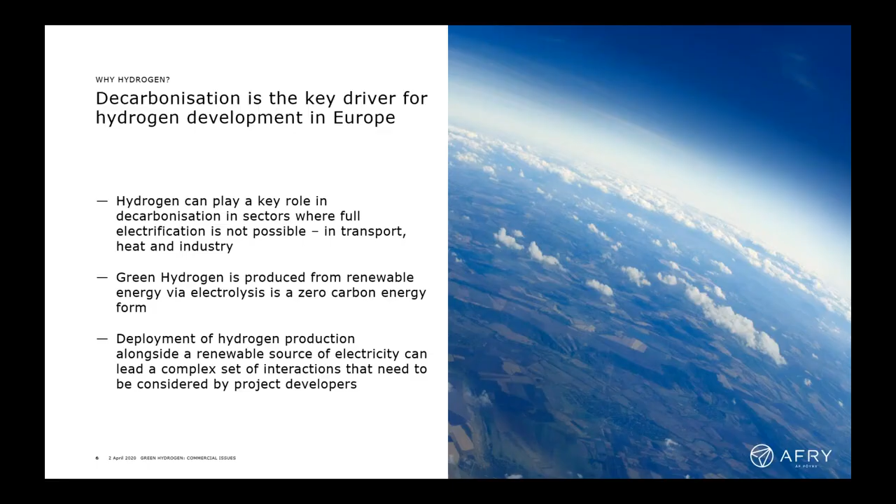So when electricity prices are low or when renewable generation is curtailed, it might be an attractive option for generators. And so it's this role of renewables alongside hydrogen production that we're going to look at today, to look at some of the key commercial issues facing green hydrogen developers.

But first, let's remind ourselves of the different production methods for hydrogen and the different colours that people have conveniently applied to the different methods.

First of all, grey hydrogen. Now this is by far the most common form of hydrogen production today, in refineries, ammonia production, and also in chemical manufacturing. It's also the cheapest form of hydrogen production, and it's through the reformation of gas or the gasification of other fossil fuels, so it breaks down the hydrocarbons into hydrogen and carbon. The big issue with grey hydrogen is that it emits CO2, and so in a decarbonised energy system it can't have a future role.

Now, blue hydrogen, which is also produced from fossil fuels, predominantly methane or natural gas, but here the carbon dioxide that is produced is captured and either reused or stored via the incorporation of CCUS into the process. And it is claimed that up to a 97 to 98% capture rate can be achieved.

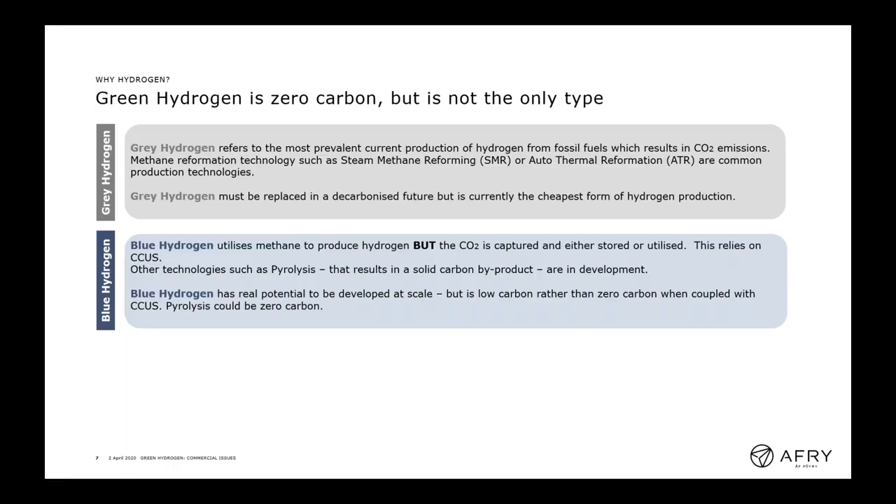Now, another blue hydrogen technology is pyrolysis, in which methane is reacted in a vacuum to produce hydrogen and either solid carbon or solid graphite. This could be a zero carbon hydrogen production method, and it does have great potential, although it is still at the earlier phases of development.

Now, thirdly, and importantly for today, green hydrogen. This is produced when electricity from a zero carbon source is used to split water into hydrogen and oxygen via electrolysis. So green hydrogen is often promoted as the only zero carbon alternative to grey hydrogen.

And that sounds great, but we have to remember that electrolyzer costs are still high compared to grey hydrogen production and also blue hydrogen production. We'll talk a little bit about that later on. And it's not until we see large-scale electrolyzer projects that we'll start to see the costs of green hydrogen reduce.

But they are now starting to be developed with 100 megawatt electrolyzers and larger, which is a significant development in size. But what's important to remember here is that when an electrolyzer is connected to an electricity grid, the carbon intensity of the grid needs to be taken into account. So just connecting an electrolyzer to the grid doesn't necessarily result in green hydrogen.

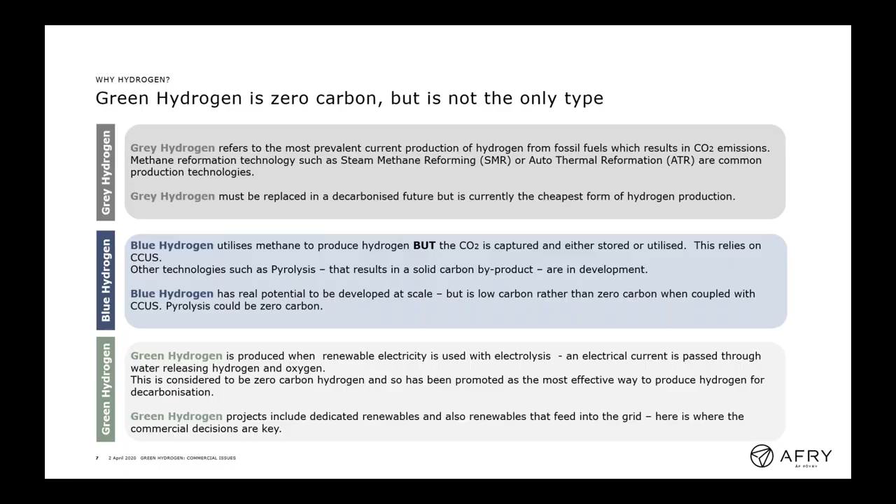Some of the larger, more ambitious projects include the NorthH2 project in the Netherlands, which is a green hydrogen project. This would see up to 10 gigawatts of wind energy being used to produce up to 800,000 tons of hydrogen annually. This is probably the largest green hydrogen project that's been announced so far.

In Portugal, the Sines project would develop a large solar PV park to produce hydrogen. This hydrogen would be used locally, but also exported to the Netherlands. This would see an investment of over 1.6 billion euro over the next decade.

Another ambitious project is the H21 project in the UK, and this is a blue hydrogen project, so is methane reformation with CCS, and this potentially could produce enough hydrogen to decarbonise much of the north of England by replacing natural gas in industry, but also in residential heating.

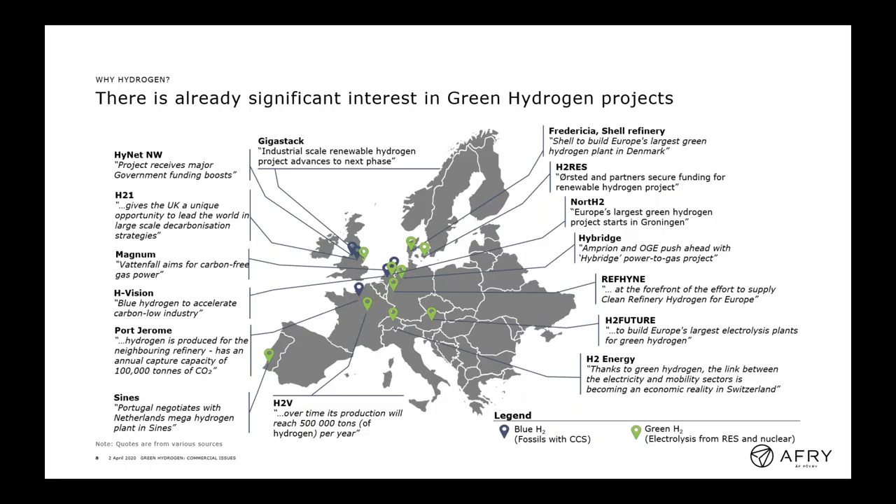Now, when considering green hydrogen projects, there are a number of technical and commercial issues that need to be considered. These include the type, location, and capacity of renewable generation, the capacity of the grid connection, or whether to bypass the grid completely, the type and capacity of electrolyzer, the storage and transport of hydrogen, and importantly, the end use application.

Now, consideration of the costs and different revenue streams will be crucial for project developers, but also for the project operators that will need to optimize electricity market revenues and hydrogen production on a daily or even within day basis.

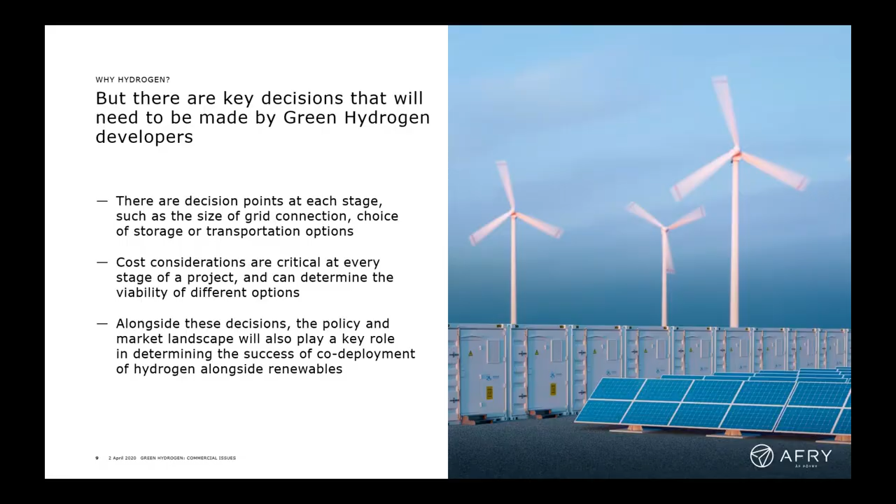But what is important to remember is that displacing grey hydrogen in existing applications and encouraging use in new sectors is going to be a real challenge and is going to require policy mechanisms and support in order to enable the kick-starting of the low carbon hydrogen industry. And when I use the term low carbon, I'm referring both to green and to blue hydrogen, but not grey.

So if we start thinking then about a green hydrogen project at a high level, this will usually start as a renewable generation project based on wind or solar. So for this example, let's imagine the intention is to generate electricity primarily to feed into the electricity grid. So initial decisions will be focused on the type of renewable generation technology, the location in order that you can take advantage of the best renewable resource, and the overall capacity of the development.

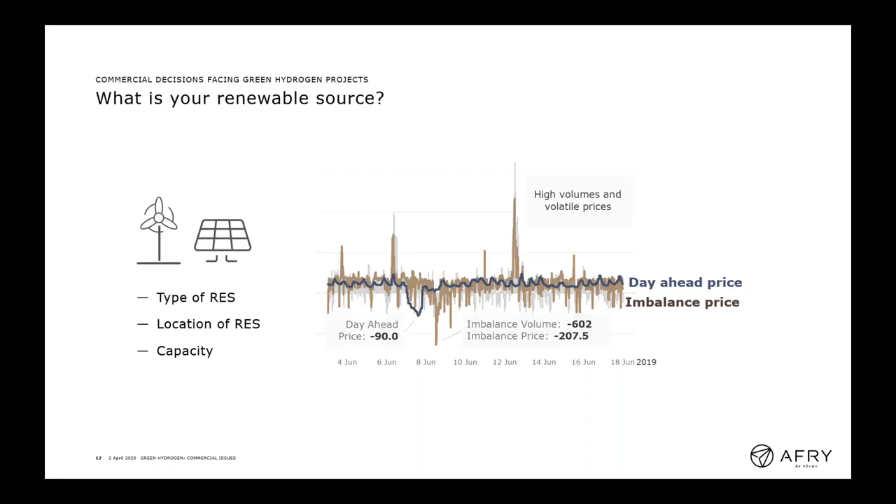When considering this, you need to think about what your expected wholesale prices are, what your exposure to the wholesale market is, what is your expected load factor, and how many hours you expect to supply electricity to the grid, which will inform you about the level of revenue you can expect to receive.

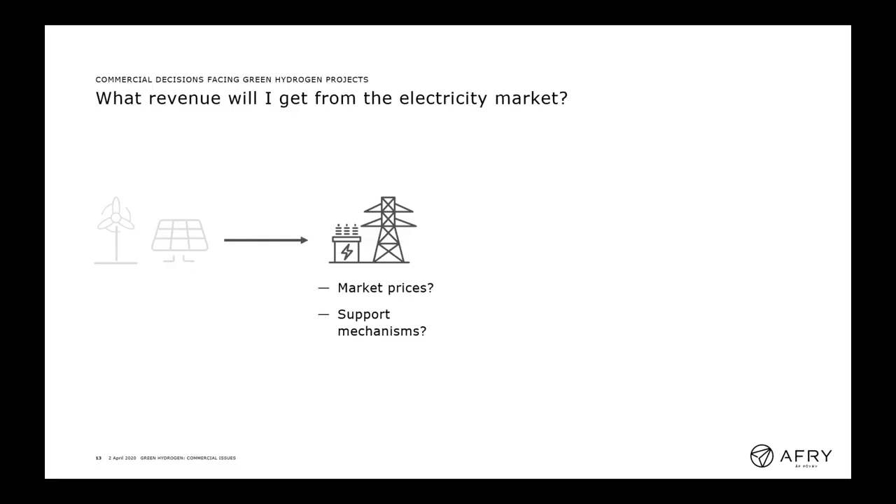So the main question for us today is: is adding an electrolyzer a good idea? This can result in a whole new set of issues to consider. Should you go for an alkaline or proton exchange membrane (PEM) electrolyzer? What capacity should it have? How many hours would you expect it to run for, and how much hydrogen will you produce? More importantly, what will the cost of your hydrogen production be, and will it be competitive with alternative sources? So will you be able to sell your hydrogen and make a return?

Now, because renewable generation is intermittent and the main revenue will come from the electricity market, it's possible that the electrolyzer utilization could be low. This is likely to lead to an uneven production of hydrogen and a high unit cost of production.

So another issue to think about is whether to put in place a grid connection for the electrolyzer. This could improve its utilization and also lower the unit cost of hydrogen production. But remember, and this is important, that any electricity sourced from the grid must be zero carbon, otherwise the hydrogen won't be green. It's been reported that in some markets where the generation sector has a high carbon intensity, the carbon footprint of grid-connected electrolysis can actually be higher than grey hydrogen. So this is an important element to bear in mind.

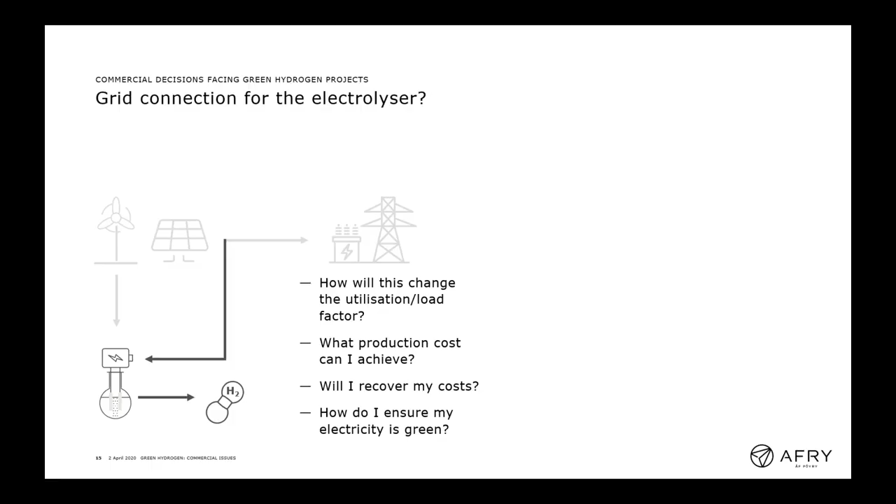Now, it's also likely that the hydrogen produced will need to be stored in hydrogen storage tanks, or for some larger projects, potentially in underground storage caverns. It's also possible to convert some natural gas salt caverns to store hydrogen as well. Now, the capacity of the storage is going to depend on how much hydrogen is being produced, and also what the end use application is and where that end user is going to be located.

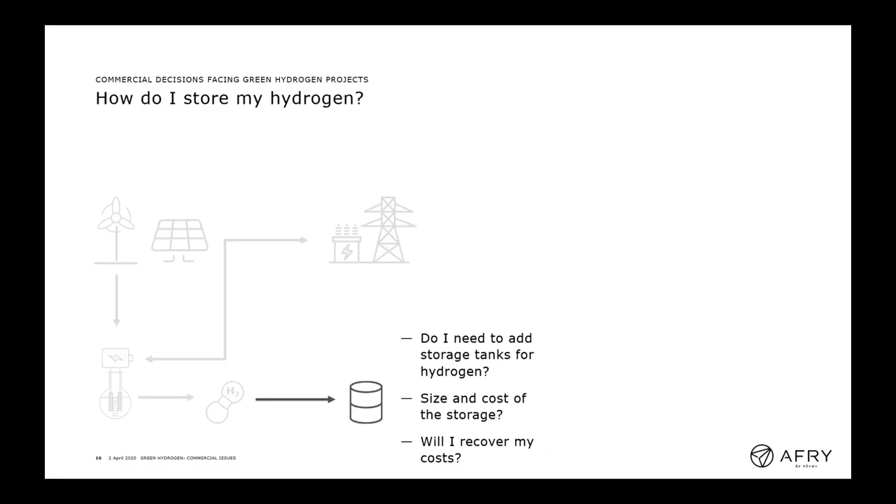Once we start to think about the end users for hydrogen, this is probably one of the most important aspects of a green hydrogen project. The key question is, where are you going to sell the hydrogen? There is currently no hydrogen wholesale market, and there's very little transparency on the prices paid by end users for the current grey hydrogen.

So does a project need to be part of an integrated development that covers the whole value chain from production through to consumption? This can then lead to decisions on where to locate the hydrogen production, and it's a trade-off between where you get the best renewable resource and where the end user is located. This is a key issue, not just for green, but also for blue hydrogen.

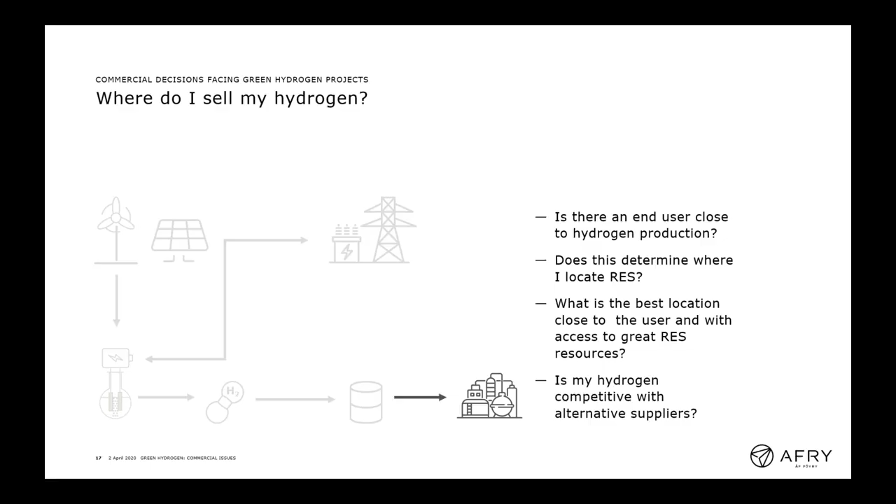Grey hydrogen is usually produced on site, so all you need is a gas connection and space for a methane reformer, but this is likely not to be the case for most green and blue hydrogen projects. Hydrogen can be and is transported, but this adds to the complexity and the cost of delivering hydrogen to an end user. Transportation will normally be done by either tanker or pipeline for short to medium distances. But as this increases costs, it can affect the competitiveness of hydrogen once it's delivered to the end user. And remember what I just said about grey hydrogen usually being produced and consumed on the same site.

Now, transport costs are also a key issue affecting hydrogen produced from low-cost renewables. Although the production cost of hydrogen from large solar developments in the Middle East, for example, can be very low, by the time it's transported to other markets, it can be much less competitive.

Now, liquid hydrogen transportation is possible, but it's not an easy process, as the hydrogen needs to be supercooled, and it also suffers from 1 to 3% of boil off. So you lose the amount of hydrogen in energy terms from your hydrogen production to your destination.

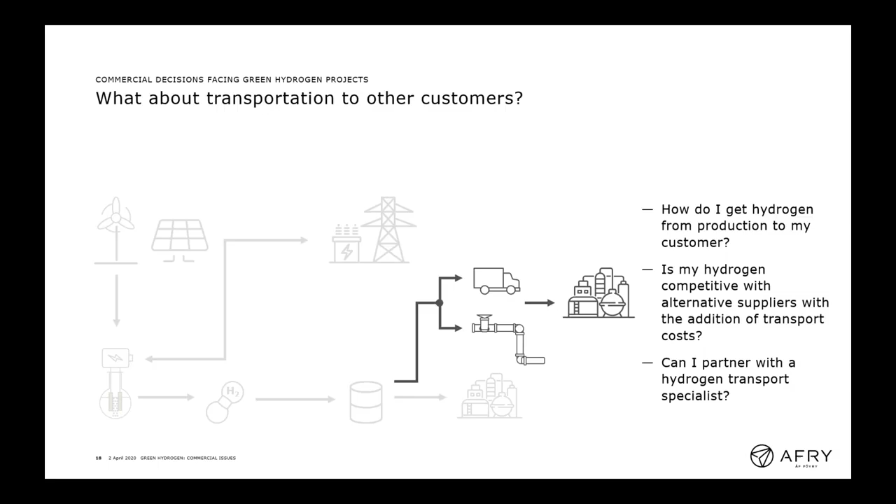Hydrogen can be converted to ammonia, which is much easier to transport, but again, this increases the complexity and the cost. It's also possible to attach hydrogen molecules to a carrier through LOHC technology, but this requires hydrogenation at the hydrogen production site and dehydrogenation at the destination site. And again, this is adding to costs and complexity.

A further option to provide another revenue stream could see the addition of a fuel cell. Here you would be converting the hydrogen back into electricity, and this may be an option where you expect electricity prices to be high on occasion, or you could provide system services back to the grid. Here it would be necessary to consider what periods of high prices are expected, whether you're in the right location to provide system services, and what type and size of fuel cell should be acquired.

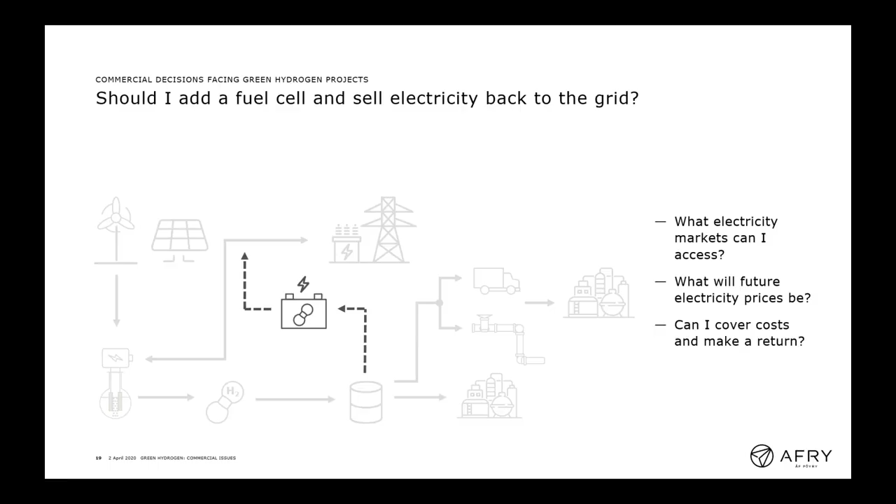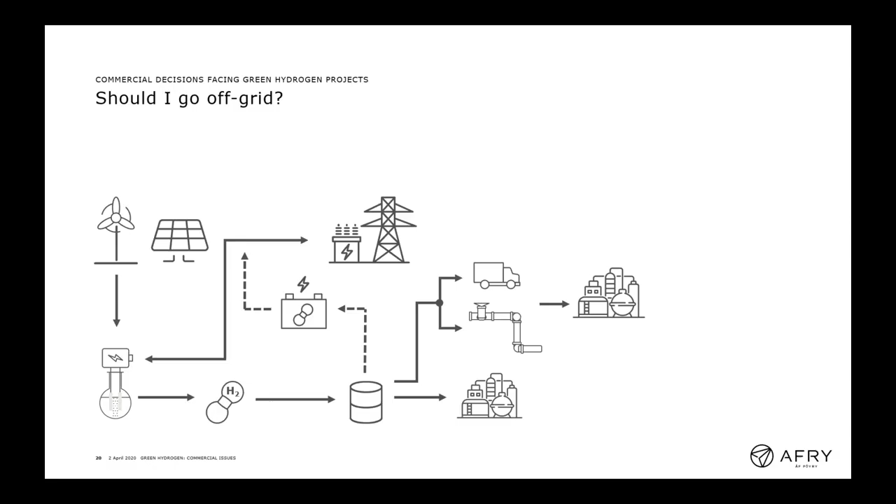That's looking at the options or decision points for a project that is selling electricity to the grid. Now, another fundamental issue to consider is whether you should connect to the grid at all, or whether you should develop an off-grid project so your green hydrogen production is coming from dedicated renewables. In this case, you take out a lot of the chain, and what you avoid is some of the connection and network charges.

The utilization of the electrolyzer can be improved because all the electricity you're generating is going into the electrolyzer, and there's also a zero marginal cost for that electricity going into the electrolyzer. But you then need to trade that off against the lack of revenue from electricity sales, and also you're probably going to need good renewable load factors.

This may limit the locations or the type of renewables that are suited to this application. All revenues are going to come from the sale of hydrogen, so you're going to need some certainty on end user pricing and contracts being put in place. And so this is where full chain projects are more likely.

Now, it may be possible in some projects to add a battery, which can smooth out the delivery of electricity to the electrolyzer, particularly in terms of solar, where you can possibly put in place a smaller electrolyzer but smooth or level off the electricity supply, so you can run it at baseload rather than just during daylight hours. And while this could help the economics, it is probably only going to be marginal.

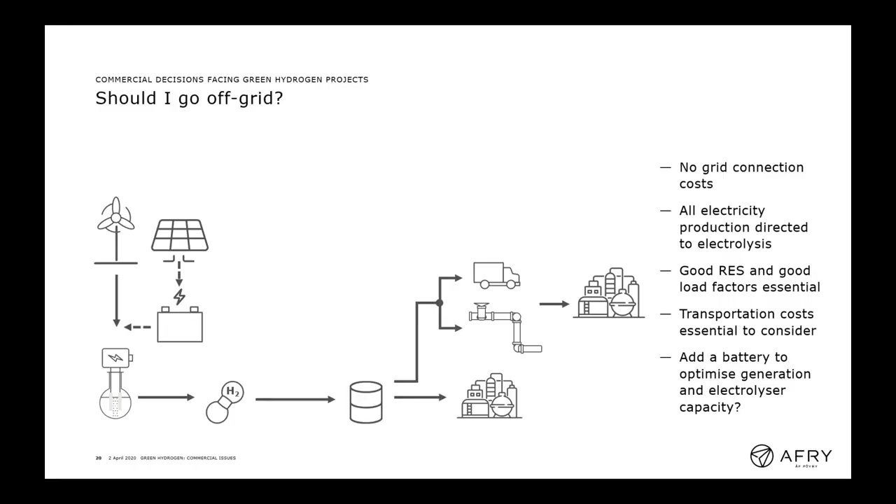So coming on to think about hydrogen production costs, we've undertaken quite a bit of work looking at hydrogen production costs, utilizing our suites of models and also our price projections, which quite a lot of you might be aware of and subscribe to our market reports. In the following slides, what I'm going to do is show the evolution of hydrogen production costs from 2030, 40 and 50.

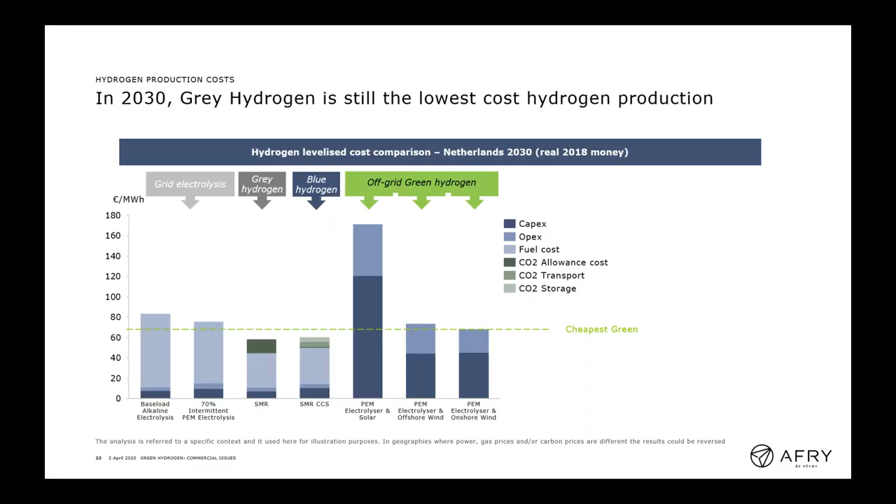It's worth pointing out that this analysis is very country specific. The charts you see here are based on the Netherlands. If we were to show the same charts for Spain, you would see a switch - the solar bar would come down, the wind bars go up slightly, but also the SMR CCS bar would go up. The Netherlands has good access to CCS transport and storage, so the CCS costs here are relatively lower than they might be in other countries.

So looking at 2040, we start to see the levelized cost for all production types, apart from grey, reducing. This means that green hydrogen is now more competitive than grey hydrogen. The shaded parts of the bar show the reduction from the 2030 level you saw on the previous slides. The reductions in the levelized costs here are largely due to lower CapEx, both for renewables and electrolyzers, and also some reductions in the CCS costs.

So you can see here now that onshore wind is much closer to the levelized cost of blue hydrogen, although blue is still the cheapest form of hydrogen production in 2040. The reduction for green hydrogen is largely due to reductions in renewables, but also because our central electrolyser capex now reduces from 680 to 595 euros per kilowatt.

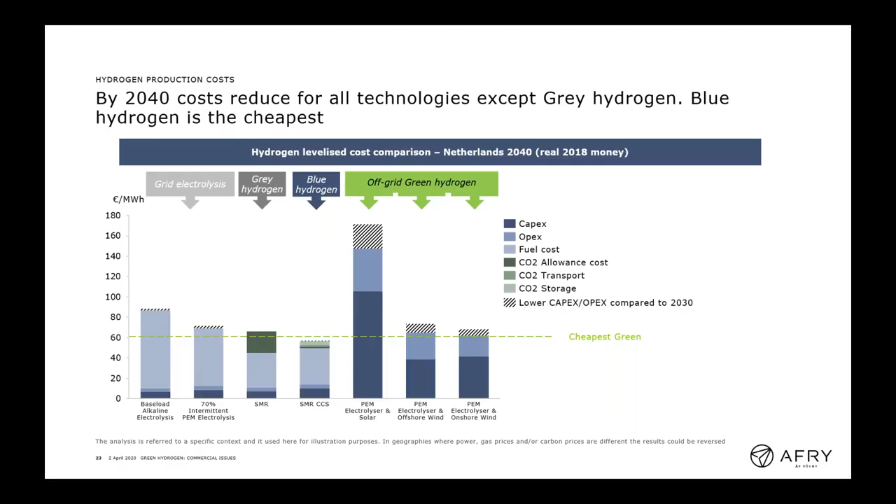Now, by 2050, we see a further closing of the gap between onshore wind and blue hydrogen, largely as a result of a reduction in electrolyser capex here to 510 euro per kilowatt. If electrolysis costs can be reduced further, and some have been forecasting 200 euros per kilowatt, green hydrogen in the Netherlands could be the cheapest form of hydrogen production by 2050.

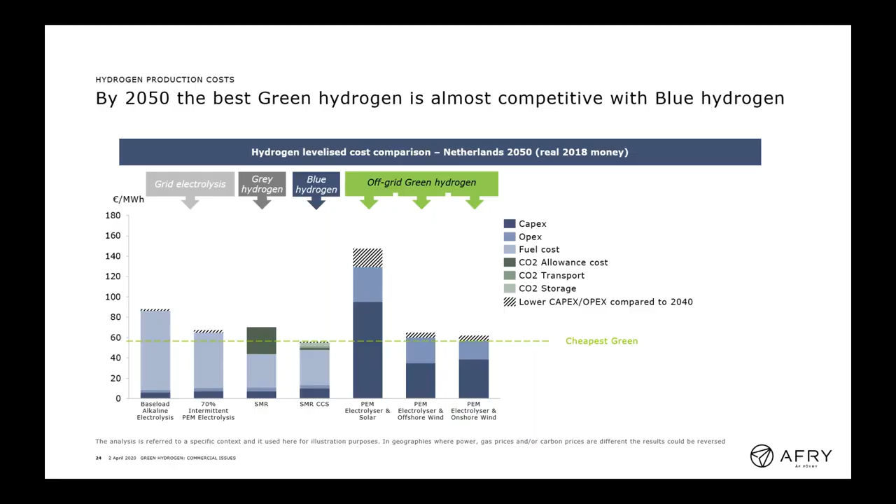But it is important to remember that we should not just be focusing on production costs. We should be considering the complementary roles that blue and green hydrogen can play in the transition to net zero, and we shouldn't be thinking that it's one or the other. What we need to consider is the delivered cost of hydrogen rather than just the production costs, and these vary significantly due to transportation costs and end user application. And whilst it becomes cheaper to produce blue and green hydrogen, grey hydrogen could still be competitive as I mentioned earlier, since it's produced on site and so will have very low storage and transportation costs.

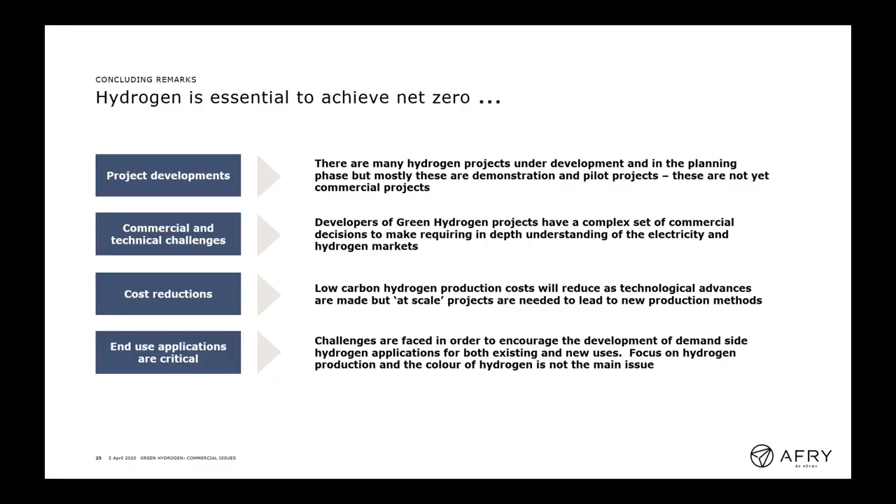So just to sum up, we all know there's significant interest in hydrogen. We can see that by the number of hydrogen projects that are announced and underway. But remember that many of these projects are unlikely to achieve fruition without some form of subsidy or support. There are still lots of technical and economic challenges that need to be overcome, both for green and blue hydrogen projects. Perhaps the biggest challenge for low carbon hydrogen is making it attractive to the existing end users who are using grey hydrogen, who want to decarbonise, but also want to maintain their competitive position.

And so finally, before moving on to some questions, I just want to highlight the type of work we've been doing in the hydrogen area. This has ranged from development of hydrogen strategies through to detailed analysis and modelling, to identifying policy and support mechanisms that may be required. We've been working for a range of clients from utility companies, infrastructure companies, gas producers, development banks, and power producers. And we've been working in many European countries, but also in some other regions such as China. So for any other information or for more detailed analysis that we can carry out, please do get in touch with us.